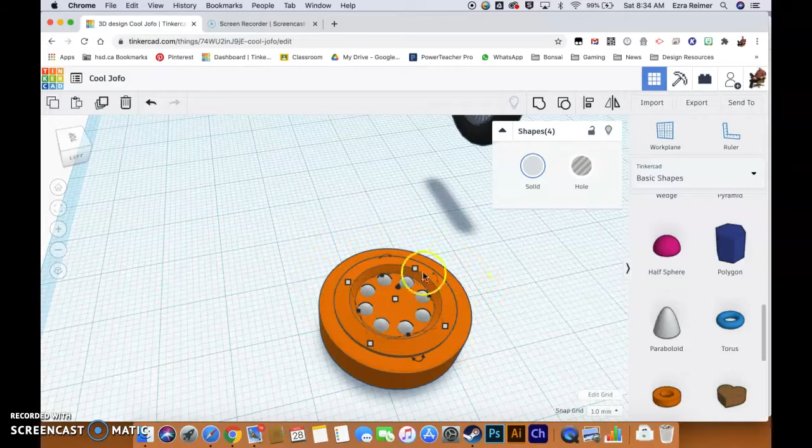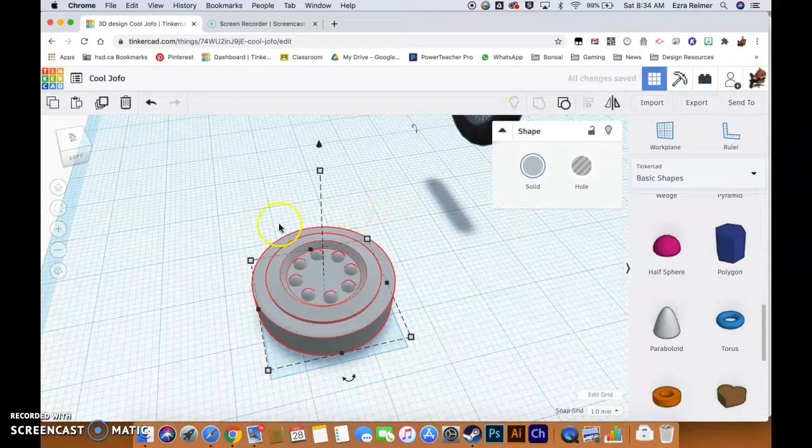First things first, I want to make this look a little nicer, so I'm going to change all its colors by clicking on the color preset here. I'll make it a slightly lighter gray. Okay, and I'm going to group this object, which makes it a little easier for me to manipulate and move around later. So we've got our wheel hub here.

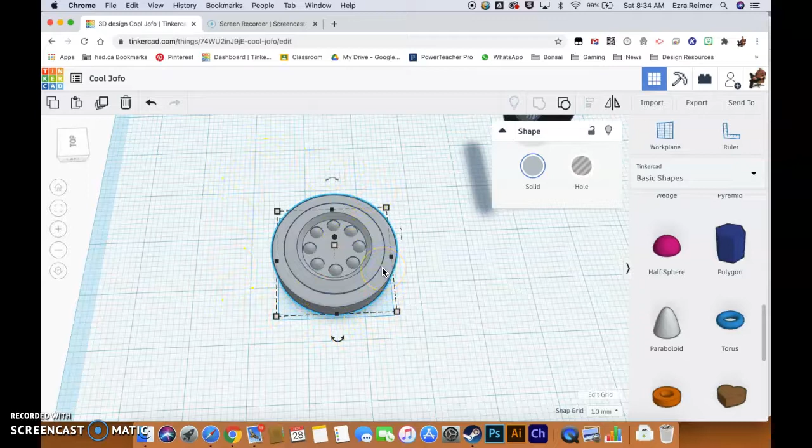Now we are going to move to the part of this tutorial where we add spokes in. There are a couple ways you can do this. I'm going to show you the slightly more complicated way because I think it gives a better result, and it allows you to be a little more customized in how you approach this problem.

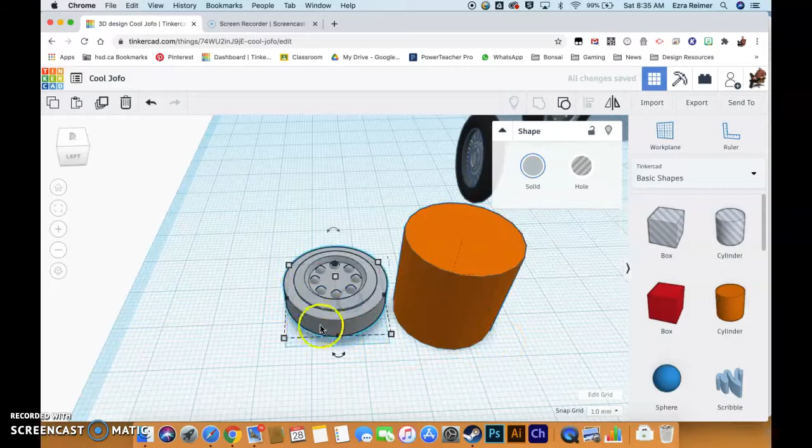Generally speaking, spokes are built out of cylinders, so I'm going to grab a cylinder here. This is why I like to work at a larger scale - I'm going to drag this larger. You can always go smaller later, but since we're working in Tinkercad in millimeters, this makes it easier for this tutorial. Let's drop this down to about a 1 millimeter by 1 millimeter cylinder. I'm going to undo that - I'll just make it a little longer.

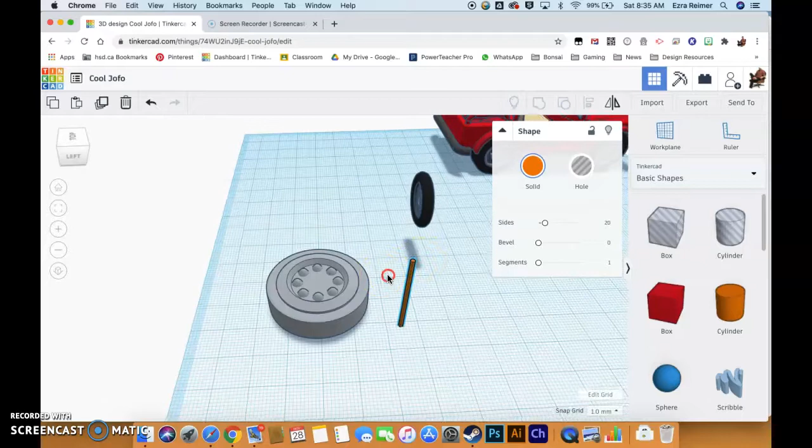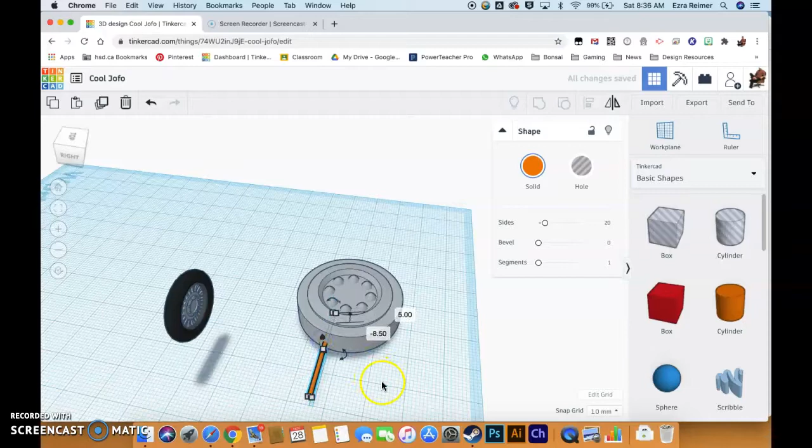Now we've got two different ways we can approach this, but let's rotate this cylinder by grabbing the rotate tool. Hold down shift to drop it to 45-degree increments, and then bring it over here. Remember, you always have to kind of rotate around in Tinkercad since you're not sure exactly where something's sitting. I'm going to drop this cylinder down so it sits within the wheel.

Remember there's that great hotkey F - if you click F, it'll always lock in on your object. I'll click on that. This is why I prefer to work at a slightly larger scale; it makes selecting these nodes as you work on them a little easier. I'm just making this cylinder a little shorter, like this, for the purposes of how I want to design this wheel.

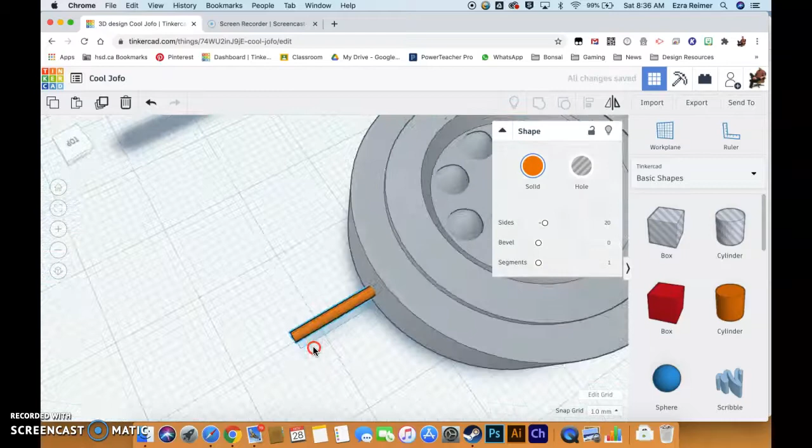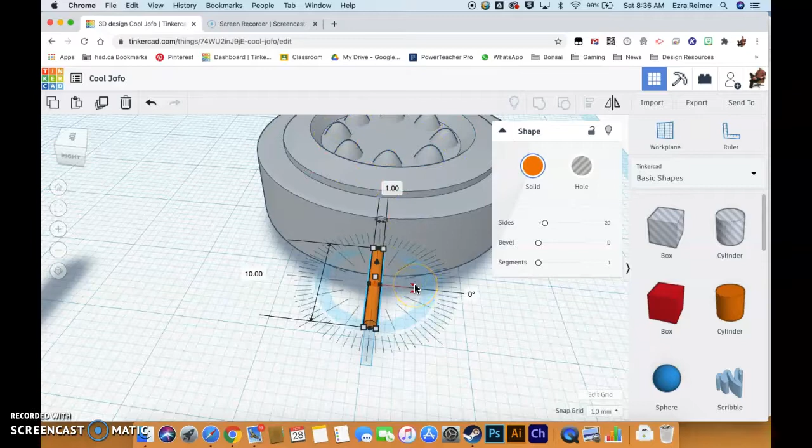Now, I could just stop at this point and position it centrally, then begin that whole radial duplication process I did with the lug nuts. But I actually want a more complex design on my wheel hub.

So here's what I'm going to do. Number one, I'm going to rotate this by about 10 degrees. The reason I'm doing that is because I want to create a little bit of a V shape to my cylinder, or to my spokes.

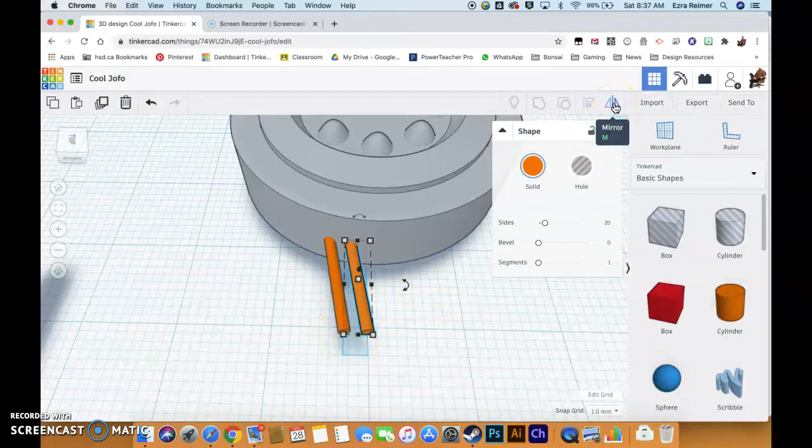Then I'm going to hold down the Option key, click and drag, and create an opposite rotated cylinder. Now, I could click on the rotation tool and rotate it back 20 degrees to compensate for the 10 I already turned it, but you can also click on the mirror tool or hit M. I'll click on that, and just click on the mirror tool right there. Now I have my spoke shape pretty close.

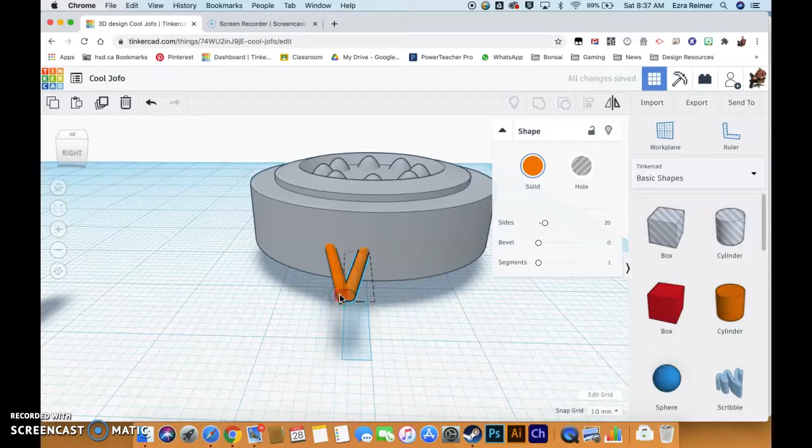I kind of want it just hitting a little bit right, actually at the same point. Now here's a very handy tip: it's great that Tinkercad wants to snap to the grid for you, especially with small things and getting them to line up, but sometimes that grid is too big for your purposes. So you can go down here to the bottom right-hand corner, click on Snap Grid, and change it down to 0.1 millimeter.

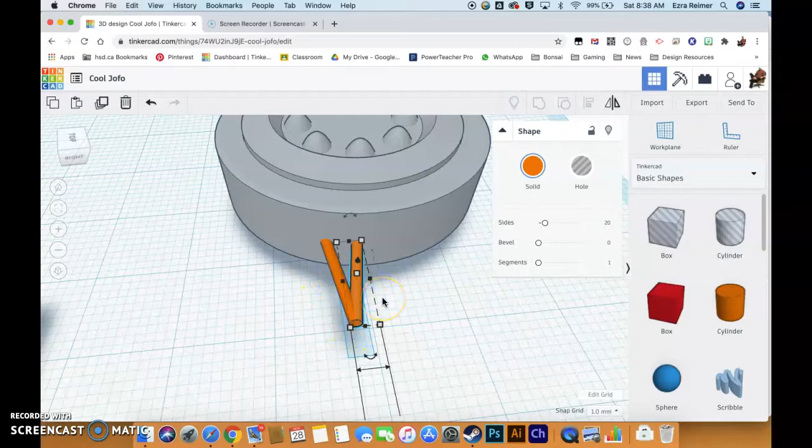Then you can use your keyboard to adjust it by 0.1 millimeter per click, and that makes things a little more precise when you need that precision. You can always go back to a 1 millimeter snap, but I find this super useful, especially when you're trying to combine complex shapes or angles and need to really fine-tune it.

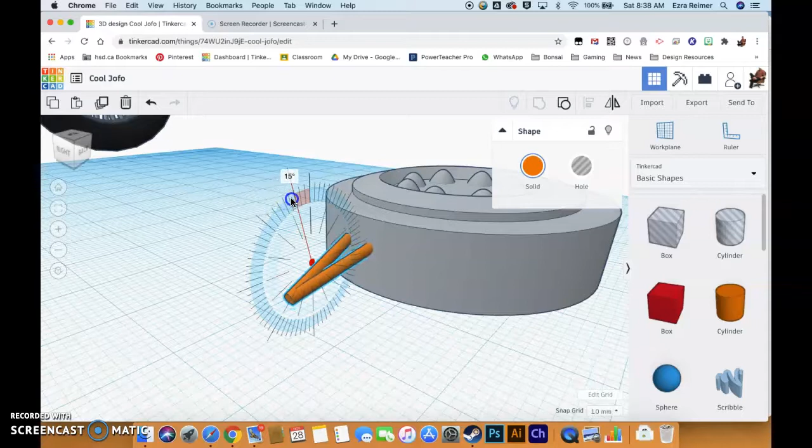Okay, so we've got the basic spoke shape. Now what I want to do here is group it, so that it's a single object. And I want to do one more thing, which is put it on a tiny bit of an angle. So I am actually going to rotate it about 15 degrees.

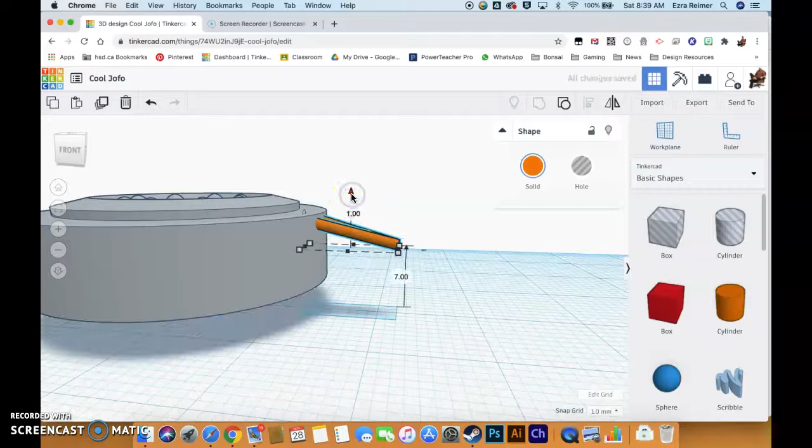That's kind of happy with that. I'm going to raise it up so it sits right there. It's looking pretty good. Maybe bring it up just a tad more. And I'm going to once again duplicate it, holding down the Option key. Duplicate it, mirror it.

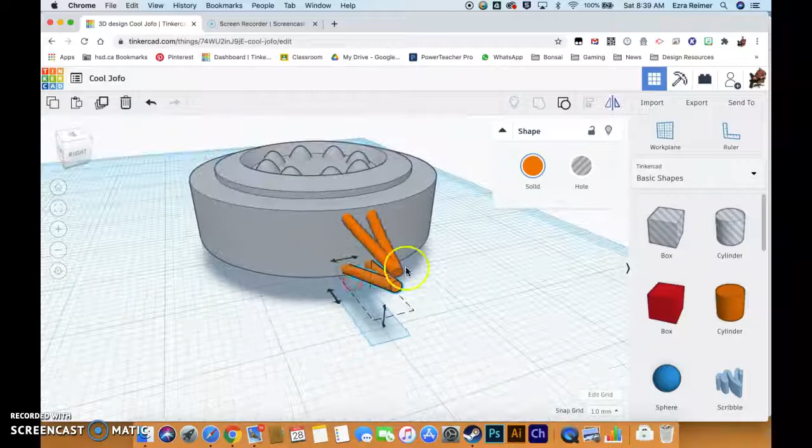Now I've got a really nice dual spoke pattern here. It's a great way for doing all sorts of different things. I'm going to group these so that they're a single object.

Now I do want to make sure that they're pretty well lined up, and they look pretty lined up here. I'm going to zoom out slightly, and then I'm going to do the same thing I did with the lug nuts.

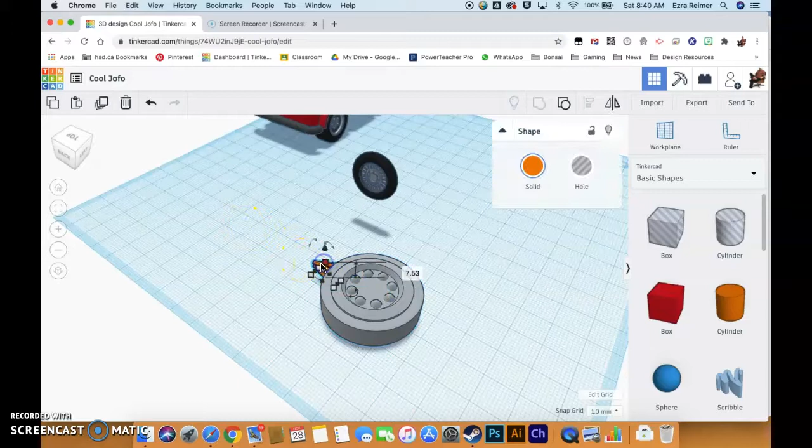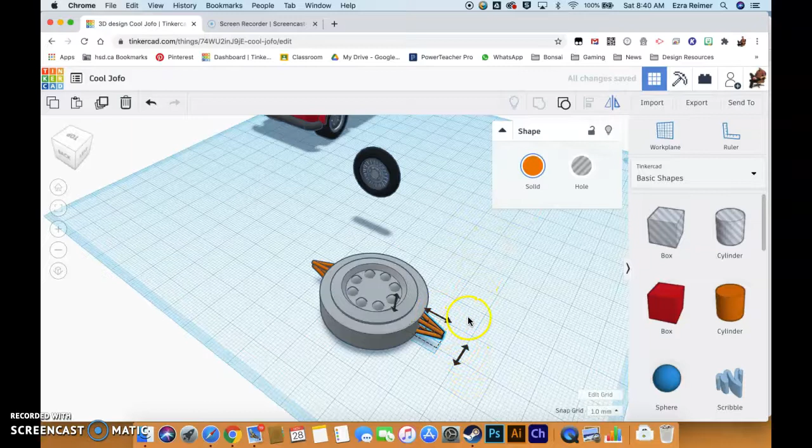I'm going to click on it, hold down Alt, and drag, holding down Shift so that it is on the same alignment, although we can always fix that later. Then I'm going to mirror this, just to flip it around. And I am going to make sure I do drag it out there a little bit.

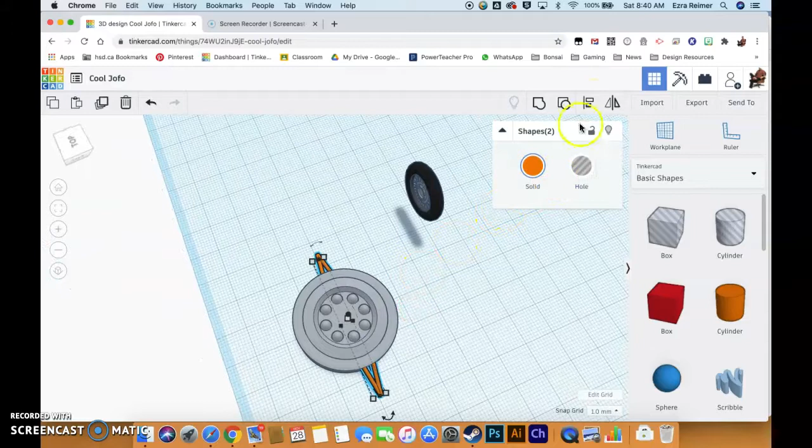Okay, so we now have a fairly complex spoke system. I am going to select them both by clicking on one, just in case you'd forgotten this - you click on one and then hold down Shift, click the other one to select them both. We're going to make sure they are aligned on the two planes we need, the middle and the vertical, which they are, and we will group them.

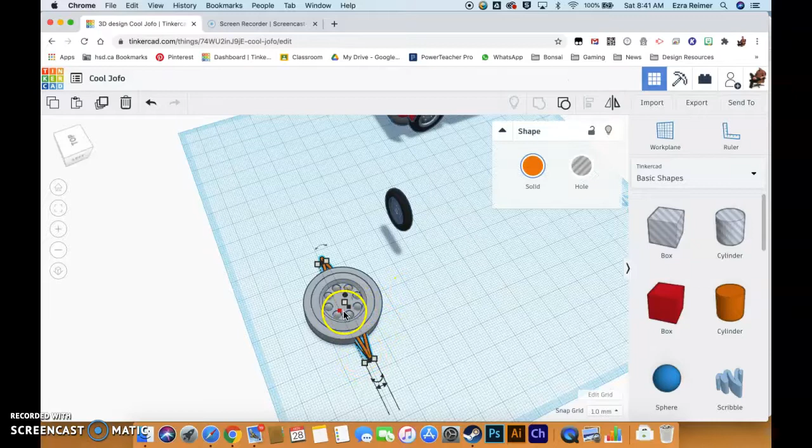It is super important - this does not work unless you group it, because you need it to rotate around that central axis point. Now let's select both the hub and the spokes.

Make sure - see, they're slightly off from center - so I am going to center them here. There we go, and center them there. They need to be centered on both these planes because they're supposed to rotate around this hub exactly from that center point, so they do need to be matched.

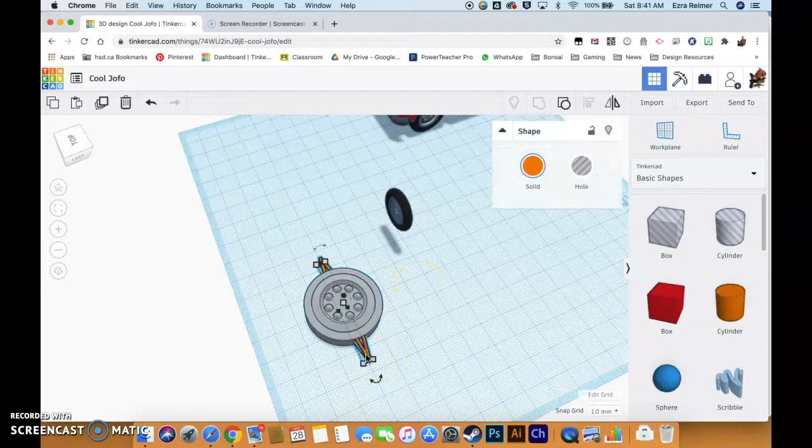Now, here comes the duplication part. So we're going to select the spokes, we're going to hit duplicate, then we are going to rotate. In this case, I'm going to rotate them - I think 10 degrees works well for the size I'm at.

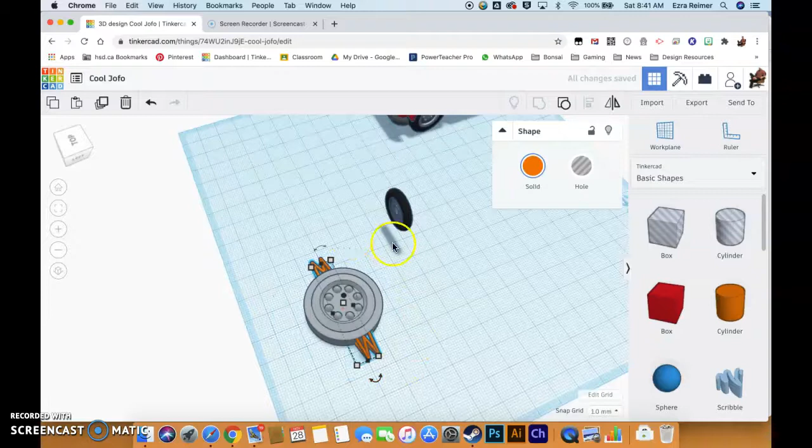If you're following along, this might be slightly different. You can rotate it once, 10 degrees. Do try to remember that this is 360, so it should be some increment that will have it end up even at the end. Then, leaving it selected, just continue to hit duplicate until you are back to your starting point.

Which brings us to the point where I have this really, really nice, super complex spoke pattern here, right? You can never do this if you were doing it by hand, one by one. I guess you could if you wanted to drive yourself completely insane, but that's not something I would recommend.

Okay, so spokes look beautiful. You could always do this in two stages with a top level and a bottom level, and then you could even do an offset spoke pattern for even more complexity. But in this case, I figured this was probably complex enough.

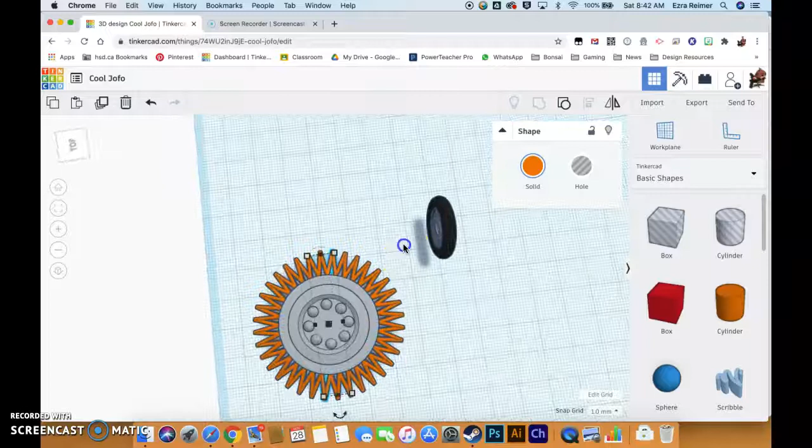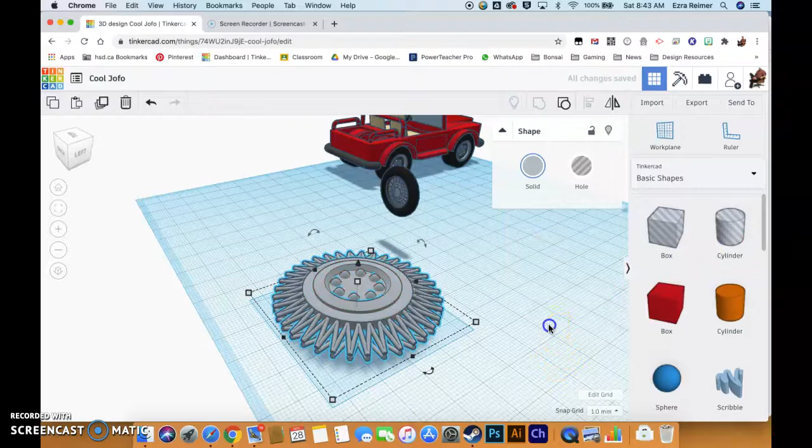So once again, we're going to select everything, and we are going to group it. Take a moment for the computer to process this - this is a browser-based program, so it does move a little slowly at times. Make sure it's a solid color. It's kind of processing away there. There we go - wheel is beginning to be made.

Now here comes the last section of building your wheel rim. Now this is, I think, probably one of my favorite sections. I kind of saw the possibilities of this when I was first experimenting with Tinkercad, and I'm going to show you how to do that in part 3 of this tutorial.